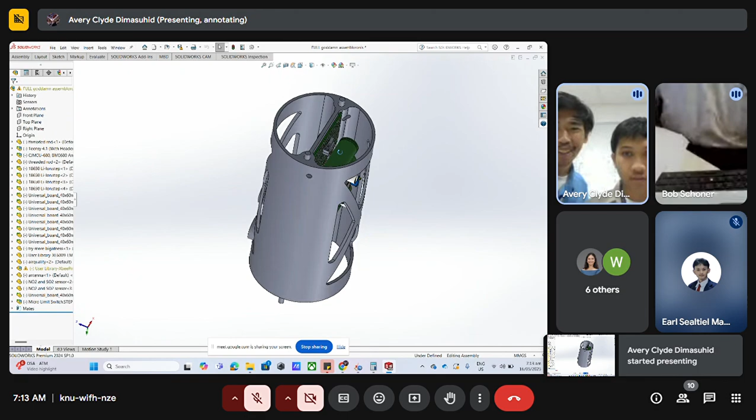There's the solid. So for our payload, we have the electronics and stuff, but the structures are still in the machine shop, waiting on. Can you see our screen right now? Yes. So this is the SolidWorks assembly of it.

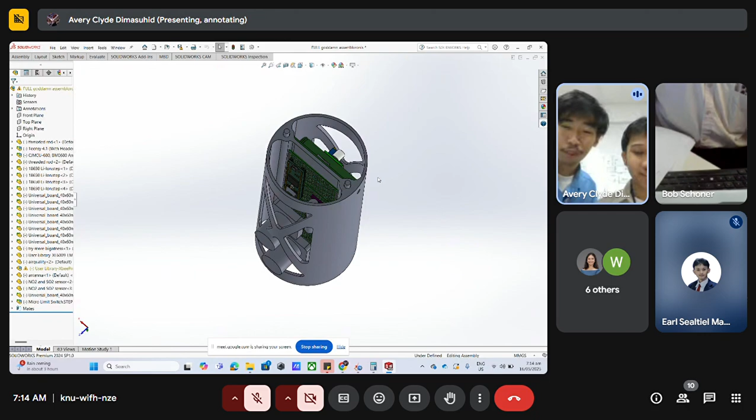So it's just a cylinder type, and we could go for the CubeSat model from the payload challenge, but there's not enough space in the minimum diameter rocket for a payload for a CubeSat shape, apparently. So we just opted for a cylinder type shape here, and that's that.

Our payload, if you read our technical report, is just the air quality monitoring payload that monitors different types of air molecules.

So it will be nutted here, here, and on all sides of the threaded rod just to secure it. And then on the forward end of the bulkhead, where this payload will be mounted - on the aft end, sorry - that's where the eyebolt's gonna be.

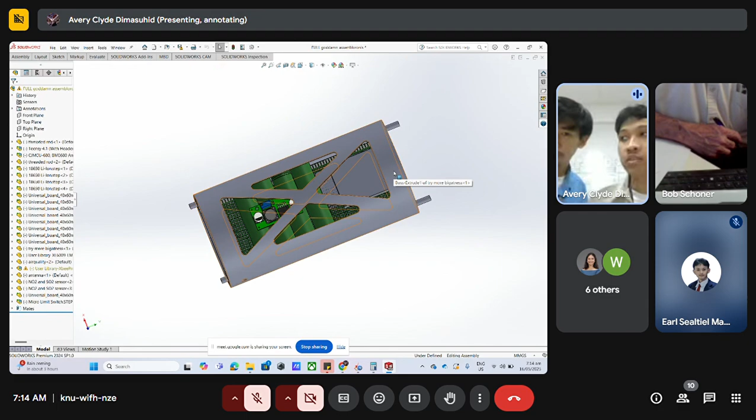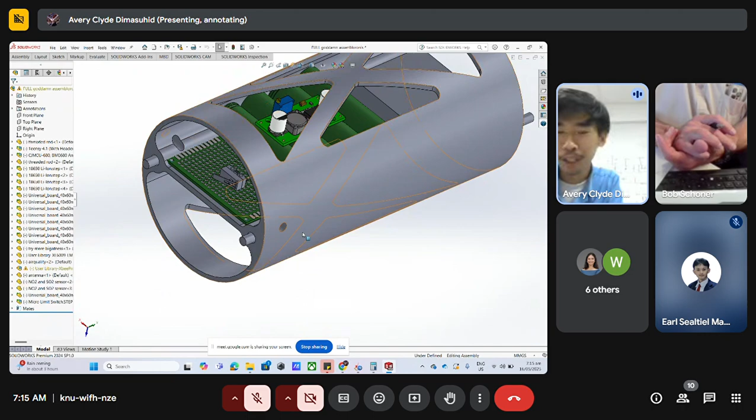How is that armed or turned on? So we're just gonna use a pull pin switch. Sorry, there's a flag ceremony, if you can hear that. Anyway, so in here there's just an open switch that will go through the nose cone section. This is similar to what the avionics will show later, where they also have open switches. So that's how we arm it.

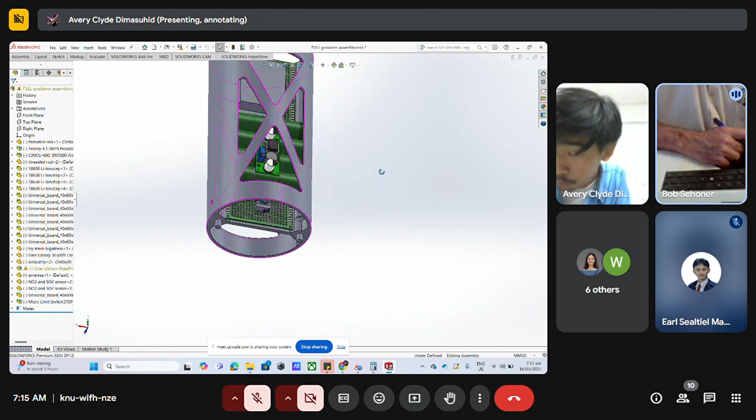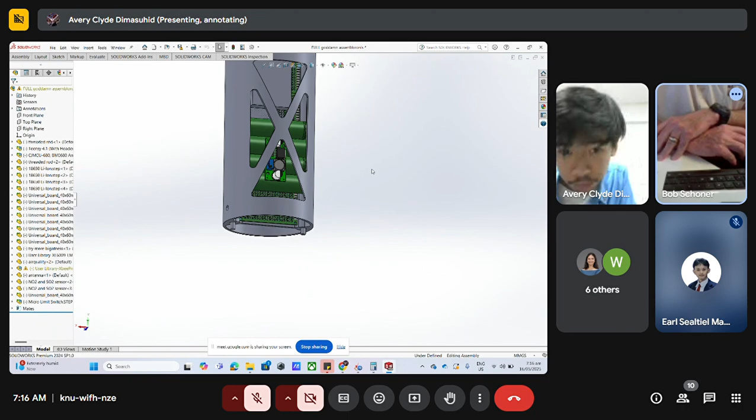I'm just curious, it seems like unless it's a really tight fit going through that coupler, there's room for it to wiggle. Is it possible to mount like a 3D printed or a brass tube? Yeah, I stopped in this assembly here, but there should be a hollow cylinder over here. Something to guide it. Oh, so that's right there. Yeah, that looks good.

These gray things are just the sensors, and we just modeled them here. So it's supposed to be inside.

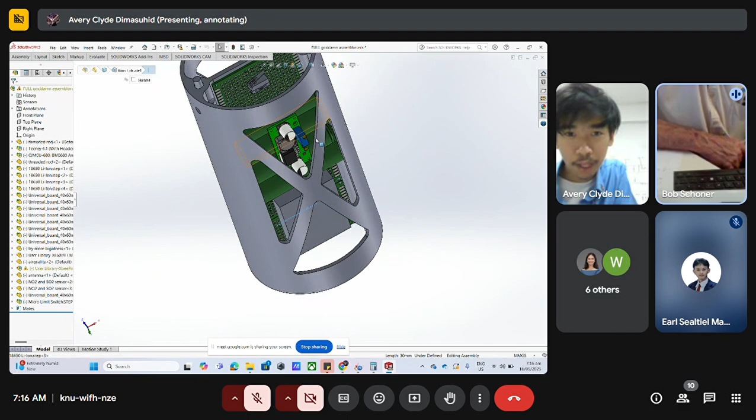The batteries are well secured in the 3D print for the G forces, both positive and negative. There's gonna be a mount made for this specifically, and additionally we're gonna have zip ties on it, to be sure. All right, good, that looks fine to me.

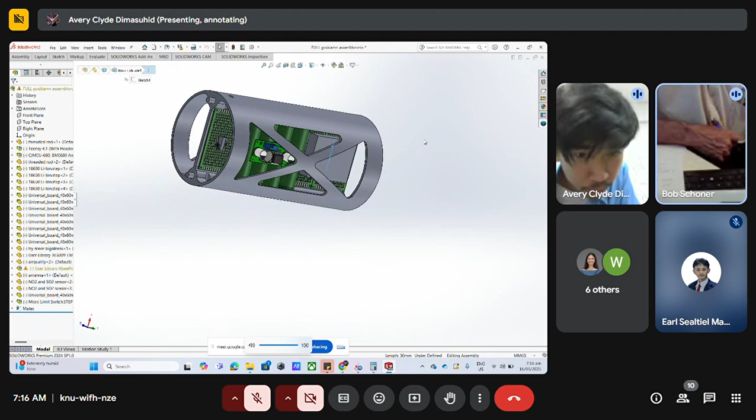Now the other components will be screwed on. I am curious about the eye nut or the eye bolt at the bottom of that bulkhead. Okay, so it's not showing in the book - it's supposed to be on the bulkhead on the bottom side, but it's not in the model. But maybe we can show you the bulkhead later.

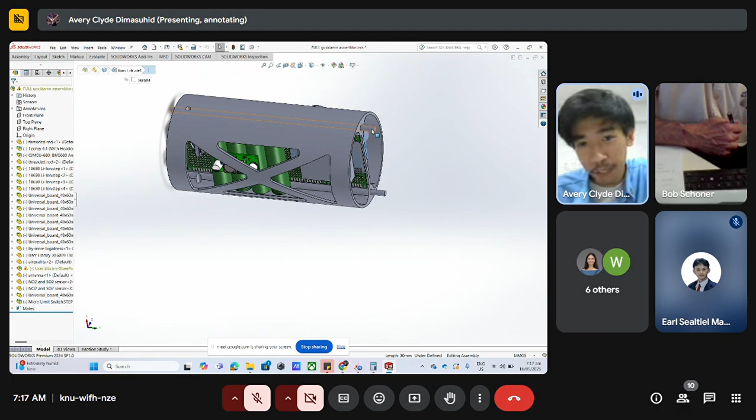So the bulkhead for the nose cone will be connected by threaded rods here, and that's where the eye bolt will be. Then on the other side, there's a bulkhead that connects to a threaded rod from the nose cone tip. So it'll be connected by threaded rod from the nose cone, then bulkhead to threaded rods on the payload, then bulkhead, and then eye bolt after.

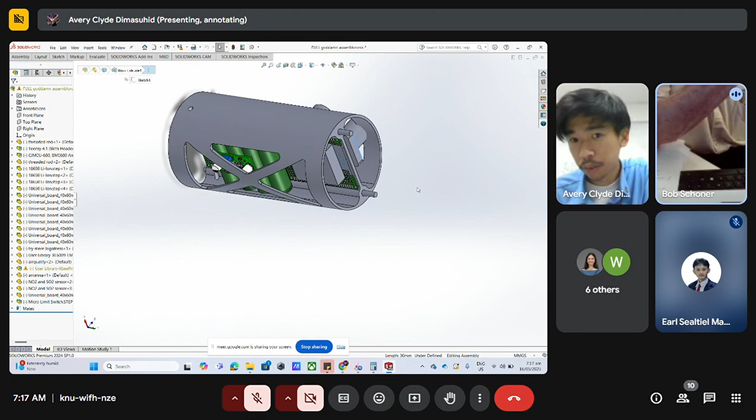I just want to make sure that the eye bolt is secured somehow so it can't unscrew if the parachute starts to swivel with it. Oh yeah, some thread lock or something. Yeah, Loctite. Right. Okay, good.

All right, I'm fine with that. Oh, have you guys started the recording? Yeah, we started the recording already. Okay, all right, good.

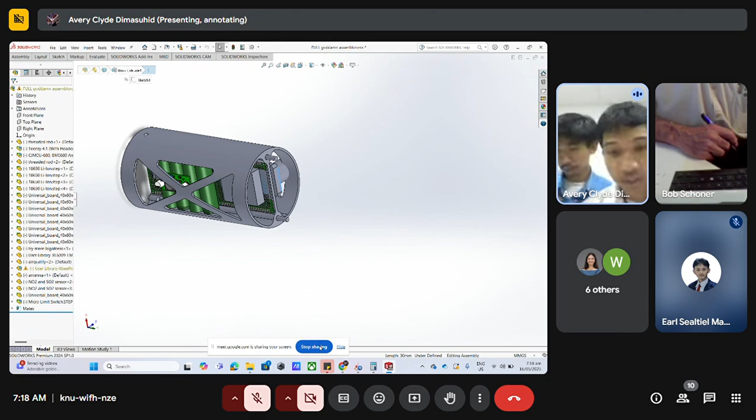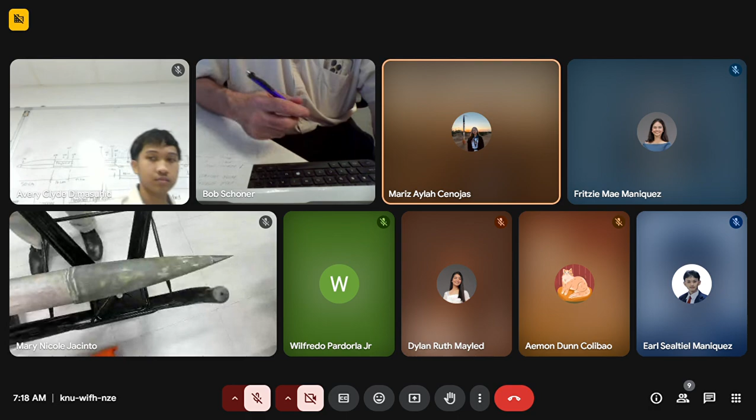All right, now can we continue with the rocket itself? Yes, all right. Okay, so that's the nose cone's side, so let's proceed to the main.

Okay, I'm waiting for the camera. Anyway, so can you guys zoom? Okay, so for our main airframe, that would house the main recovery system, and I think the representative for the recovery system can walk us through the mechanisms.

I'm not hearing anything. Can you turn it on? Sorry. Okay, can you hear me now? Yes, yes, go ahead. Alright, so let's do this again.

So this is our current main assembly. We have our main and drogue.

These are connected to our shock cords. We're having some connected to our nose cone, and then our shock cord that we're using is a half inch tubular Kevlar, which is used by lots of teams as it is fire resistant and very strong.

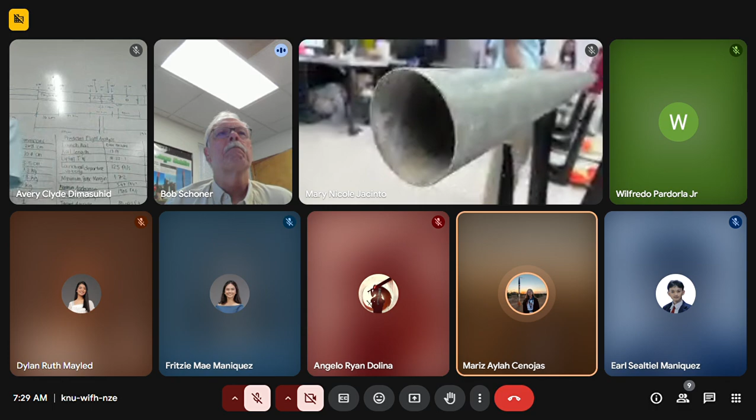Can you guys zoom out to see the overall length, just so Bob can see how long the aft is? So the aft is around 2 meters, which is a concern for me since I'm not sure if the coupler can join both airframes well, since we're still going to cut the coupler. That's something I have to raise also, if we should keep the coupler length or cutting it would be fine. So why do you want to cut it? What's your thinking behind that?

Flight ops, can you respond? We have it at around 18 inches. The coupler is at around 46 or 47 centimeters, if I'm correct. The reason is, in our original design, we have it at around 30.3 centimeters. So we're not that sure. Going back, our original coupler is at around 45.7 centimeters, and then the one we have in our Open Rocket is at 30.3 centimeters.

But I think we've read on Rocketry Forum that the longer the rocket, the longer the coupler should be. So our concern is, should we still proceed with our 30.3 cm coupler, just to follow our Open Rocket simulations, or have that safety margin?

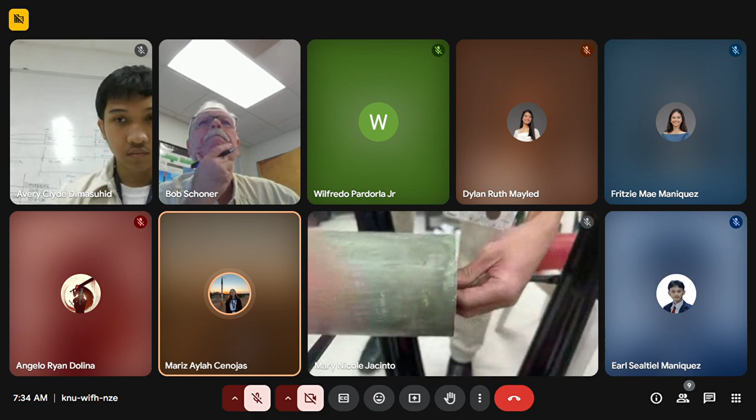So can you guys show Bob the Aeropack? So this is the motor retention. That would be at the forward end of the motor, and that's also where the drogue parachute will be connected. Also, the secondary retention is the hardware of the motor being bigger than the airframe, so it won't push through the walls of the airframe. So is that sufficient?

I'm not sure I followed that. So that motor retainer you have there, there's an eye bolt or a loop at one end, and the other end looked like it had a threaded rod. What does that thread into? Does that thread into the top of the motor case? Yes, it does. Okay.

And what prevents that from backing out of the rocket when the ejection charge fires? So what our mentor recommended is we'll use epoxy to secure it inside. Or do you recommend other methods? I don't recommend that method.

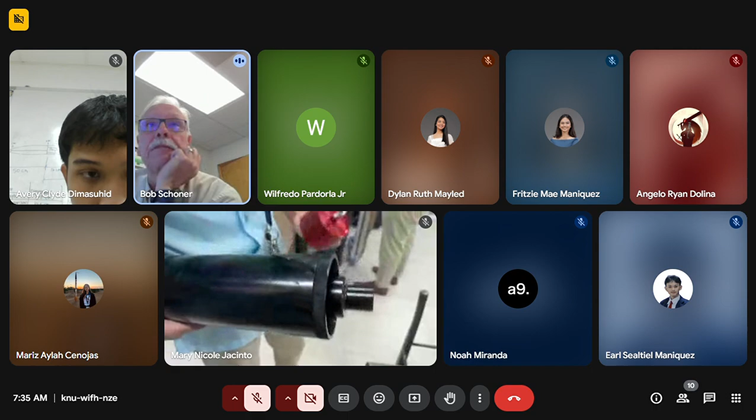Since that attaches to the motor, is there a way to fasten that red component to the airframe with screws or even large plastic rivets to keep it from moving backwards? Will thick epoxy work, or do we need mechanical fasteners? So you do thick epoxy, and then that motor case is permanently mounted in the rocket, something like that?

I don't like the advice you got for that. Hello there, I'm so sorry, I just joined in. I got the time zone mixed up. I'm Noah Miranda, I'm the mentor.

I'm currently outside right now, I misread the time zone. But from my understanding, the motor was not meant to be permanently bonded. It's the retainer itself that uses an Aeropack style attachment method. That was my understanding, and that's what my team used last year at the Spaceport America Cup. Okay, yeah, that's a different story.

The airframe's fiberglass. I don't know if the aluminum has any texture to it, but you don't want something very smooth because the epoxy needs something to grab onto. So I would sand or even use a Dremel tool to score that up so the epoxy has high and low points to attach to. Does that make sense?

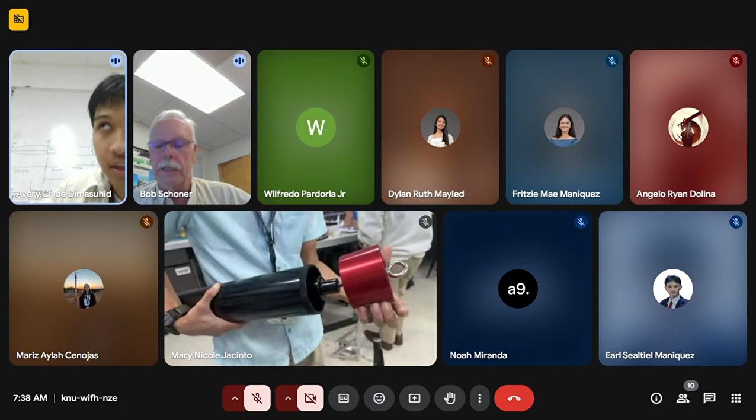Okay, thanks Noah, that's helpful. So yes, I'm fine with that motor retention. If we're going to epoxy the motor retainer, do we still have to do the rivet thing you advised, or would that work? No, that can work in place of it. All right, understood, can we proceed please?

Okay, so after that I think the last component would be the fins. So there's our fins, but it's not yet adhered to the airframe, particularly because we don't have a good epoxy to use to adhere the fins onto the airframe, since airline restrictions stop us from purchasing good epoxies. So our only available option right now is JB Weld, and I'm not sure if that would work fine.

What do you think? For that class of rocket and motor, I would like to see something a little bit more robust or stronger. I don't have anything against JB Weld, I use it in my L1 rockets, but I don't have a lot of experience with the different epoxies.

When do you arrive in Texas? June 5th, right? Or June 6th? Okay, yeah.